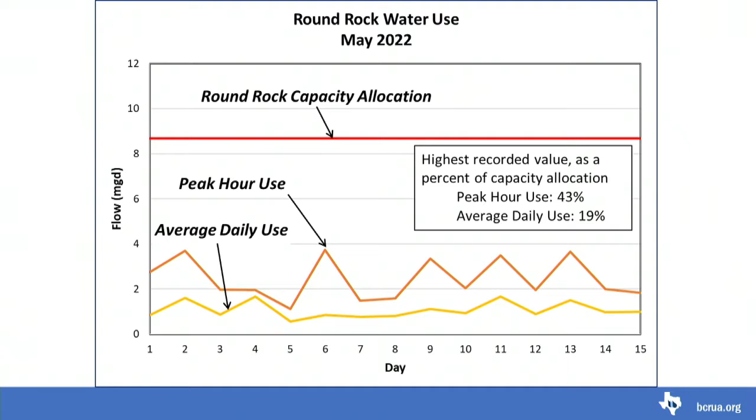And then the next slide is Cedar Park. Again, the red line is their capacity allocation, and they're ranging between 12 and 18% for their average day, and then 12 to 18% on their peak hour.

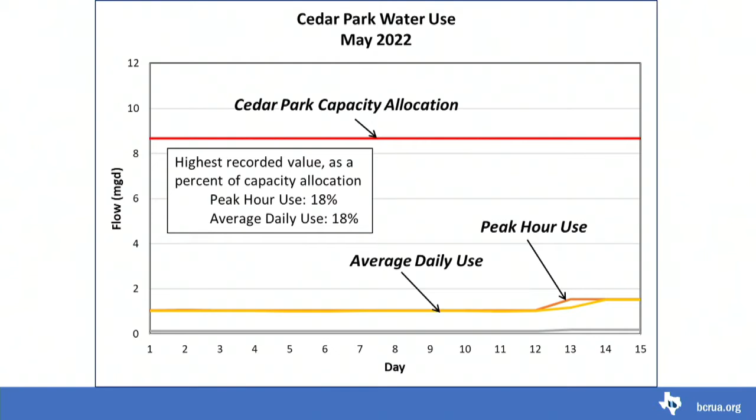And then Leander's the next. Leander ranges between 47 and 60% of their average daily use, and 76 to 95% of the peak hour capacity.

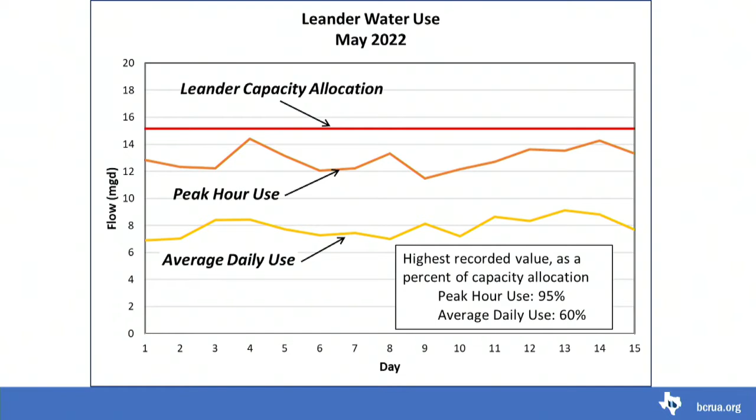The next slide shows how the demands of the three cities relate to the total BCRUA plant capacity. The plant right now has a 32.5 million gallons per day capacity, and the total use is about 12 MGD on average, about 36% of the total capacity. I hope this helps characterize the numbers I'll be providing, but I'd like your feedback as to whether that's helpful or if you'd like to see anything different.

So of the capacity for the plant, with all the cities, we're only using 32%? 36, about. I'm sorry, yeah, I couldn't see that clearly. You can see it kind of ranges. Okay, thank you.

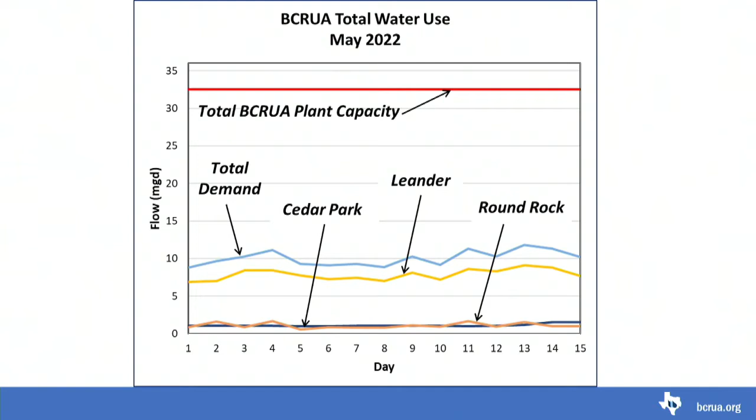You also had requested that a Leander representative provide an update on Leander's water supply, and we have Dan Grimsboe here to do that once again. Good evening. Good evening to the BCRUA President and Board members. I'm Dan Grimsboe, the Executive Director of Infrastructure for the City of Leander.

Today I am providing a presentation outlining the resolution that the City of Leander City Council passed this past council meeting, May 5th, supporting the comprehensive plan for the management of water system treatment, capacity, and demand. I provided a hard copy for each of the members. I know we had sent the link, but sometimes life gets in the way, so I figured I'd take the time to provide everybody a hard copy of said resolution supporting the strategic plan the city manager outlined in his two memos.

Many of the slides in this presentation have been provided to the City Council in a couple of different City Council workshops, so Councilmember Thompson may be familiar with many of them, but for the rest of you, it's not the first time this has been put out there. We're going to go over the focus of the recommendations, which are six areas, and I'll talk about each one briefly — what we're doing, what we have done, what we're currently doing, and what we're going to do in the future for water management.

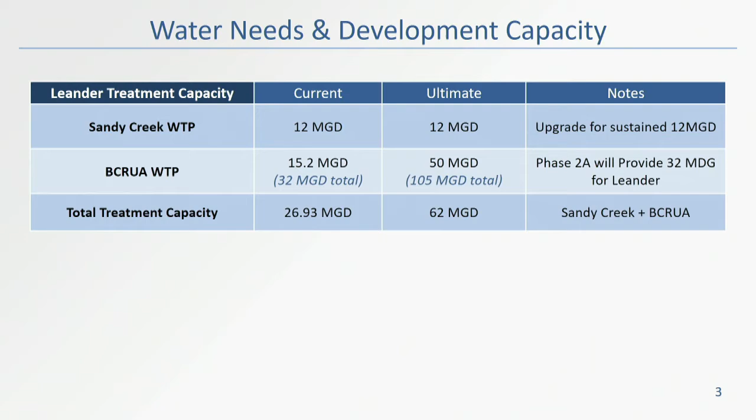The next big one for us, which is important, and that's the one we're hoping we get focus on, on top of other projects, and I have a slide that talks about that, is Phase 2A, which will provide the city, from the plant itself, 32 million gallons per day. That will get us to 44 million gallons, which will put us on the other side, literally, of the water line. So we'll have more than enough water.

So here was the city of Leander, not too recent past actually. Just quickly going over it, you can see we have 5 different pressure planes.

At that time, say even a couple years back, we had the one intake from the BCRUA, which is right here. And then we had the other one, right in this area, for Travisso. And then our water treatment plant, Sandy Creek, actually went to Crystal Falls, which is right here.

And you can kind of see the arrows, how they went through the old part of the city and then worked their way up. But we really didn't have anything going, if you want to say, east to west, mostly north to south.

Just for reference for the next one, Liberty Hill is up here, and we provide them water. And then Georgetown is in this direction, and we have a connection with them over here, which is not shown on this current map, but is there.

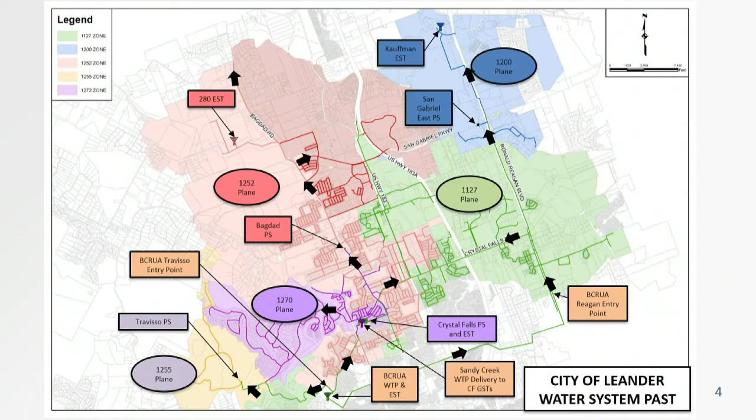So what have we done over the past basically year and a half, the 2 years? Well, in FY21 we completed these 3 projects.

So, San Gabriel Booster Pump Station, and I'm going to show you the map of all these, but I just want to give you a feel for how many are out there. So we've completed those 3 projects, which will help move water throughout the city, and they were $5 million, $1.7 million, and $1.5 million respectively.

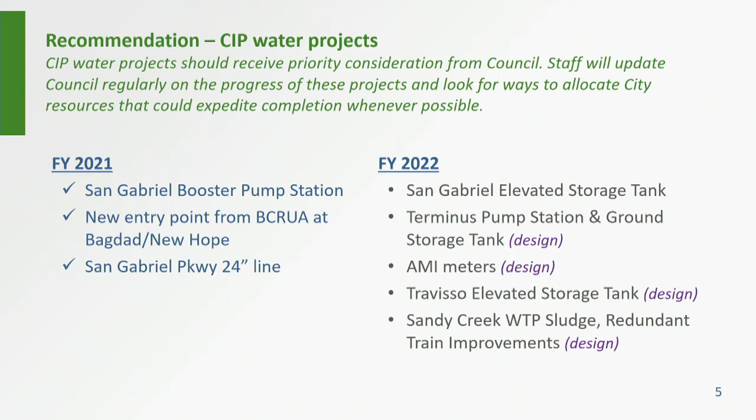And FY22, we're getting ready to bid out the San Gabriel elevated storage tank, and that's going to be about $5 million. And then you can see where it says we're in design, and we're in design for the next 4 projects that will help manage water throughout the system.

And those projects range from $5 million to the Sandy Creek, which is about $16 million for the improvements. So FY23, you can see where they're being designed now, and then next year we're going to start construction on many of those.

The one that's probably kind of important, not only to us but the other cities as related to also controlling peak demand, which you've heard about, and not exceeding our limit, is probably the Ronald Reagan and the Terminus Pump Station. Part of the initial plan of the water plant was to have a peaking factor of a certain amount, and in Chapter 8 it indicated 1.6.

But for various reasons, it was not 1.6 — it was closer to 1, because the cities would put in their own storage that they would need. And in that chapter, it indicates that Leander would put in, in phase 3, which is still a ways away, but we need it sooner, 2 million and 5 million at take points 1 and 2.

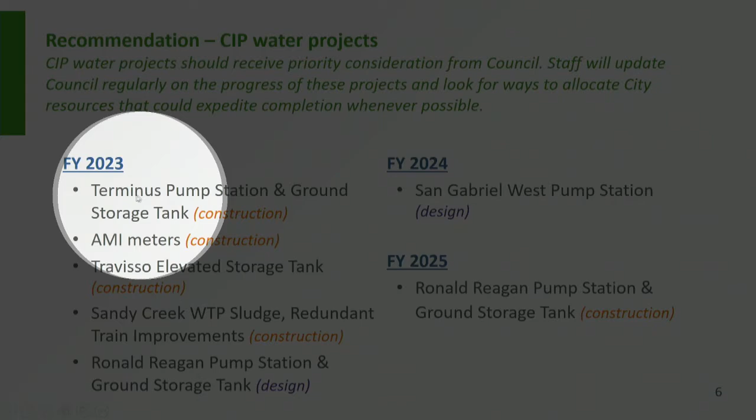Well, the Terminus Pump Station is now going to be really where our take point is, which is take point 3, the new one, and you'll see that in a minute. The other one is the Ronald Reagan, which is going to be designed as the 5 million gallon storage tank, and the Terminus Pump Station will be the 2 million gallon storage tank, as per the initial design.

Those were actually not designed to be done for years out, but not only those two projects — several of these projects have been moved up dramatically from the initial water master plan.

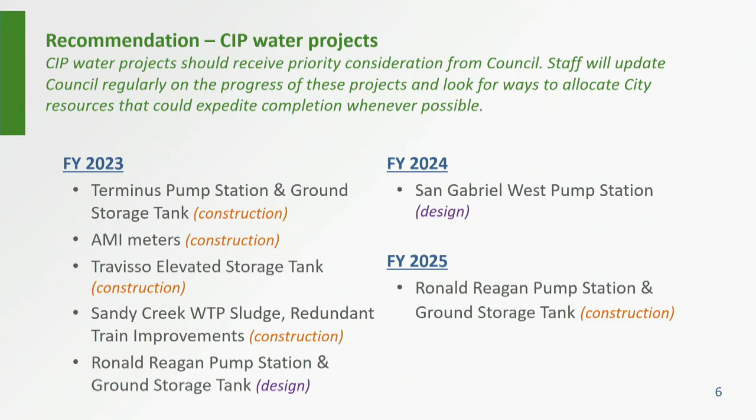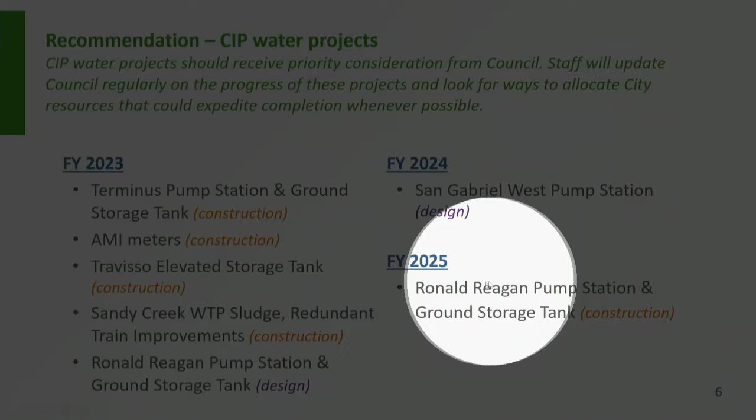And then you can see the last couple where they fall into, as far as this one will help the northwest part of the city and also Liberty Hill. And then this was when we're going to start construction for the Ronald Reagan.

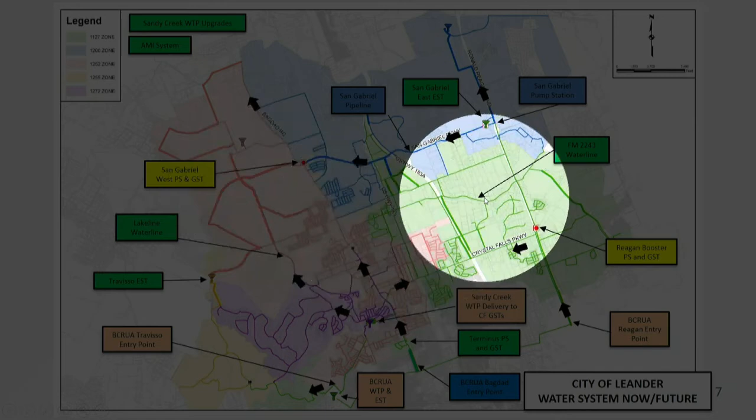What we haven't -- you'll see that these lines all popped up. They're not quite on the list yet, but we do have this one, which is also another one going from east to west, to allow water to go that direction, and that one is under design and should be under construction hopefully in the next year. So you can see that we made quite a few improvements and moved quite a few projects up to facilitate

bettering the distribution system. That doesn't help the treatment part of it. That's the BCRUA, that's Leander's plan, is to have that plant built. It's been the plan since the beginning. That $50 million will take Leander quite a few years into the future. It's just getting there.

Any questions before we kind of move on with Leander's projects?

That's what I was just getting ready to ask you, for those watching online, to clarify how all of these improvements actually impact BCRUA, our partnership with BCRUA. It doesn't affect that at all.

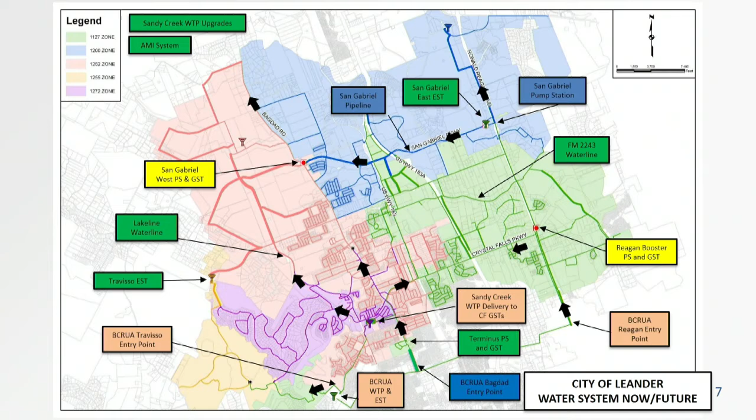It's going to help us manage water better and be able to control demand better, especially when we get the required ground storage tanks in. But until we get that in, we do have concern with our... And remember, the BCRUA plant is the plant that Leander really does use. So when we're using the full amount, it's because that's our plant, and we plan to use it, and it's going to be the primary source of water for the future.

Sandy Creek may get some further expansion, but not probably anytime soon. So BCRUA, this is important for us.

So right now, these are the 4 projects, which is actually quite a bit. We have the raw water line that's under design, and then Phase 1D, which will provide Leander an additional probably 3 million gallons -- we were hoping closer to 5 million gallons. But I think we've talked before that the raw water line is going to put some restrictions on flow, which will limit the amount of water that we'll actually receive for Phase 1D.

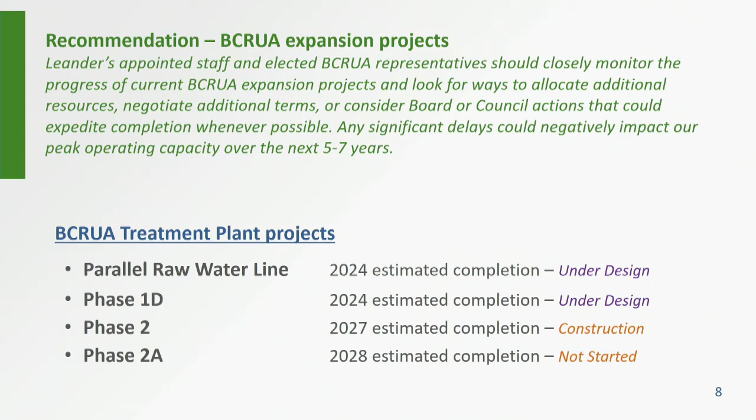Phase 2 is actually the deep water intake, but that doesn't add any water -- that's the mechanism for getting raw water to the 3 water plants. And then Phase 2A, which is the phase that has not started, that's the phase that Leander -- and we've talked about it a little bit in the OC -- that's the phase that we really need to get moving forward, because that's the one that will get Leander the water that allows Leander to be on the other side of, if you want to say, the deficit water line.

They came to us, and in my understanding, they were kind of promised water, but when Gene and I were learning the situation, we had to tell them no, we can't provide any more water, because they have an additional 600 acre-feet they can buy out of Lake Travis from LCRA. They'd love for somebody to treat that, but unfortunately we're not able to do that, and I had to let them know that was the case.

So they have the 1,200 acre-feet that they can receive from Lake Travis. Our contract with Liberty Hill is for 40 years, so we are their water supply, at least for that amount.

Georgetown is a temporary contract that was initiated, and they initiated that contract with Leander much the same reason why we can't initiate the contract with Liberty Hill, because their growth is tremendous. If you were to go look at the presentation they gave their council, and I have one with me, their red line actually looks probably worse than Leander's.

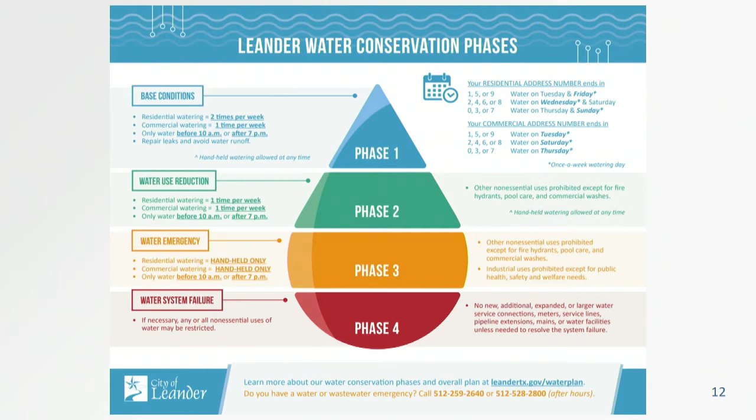So our irrigation pilot program—this is one where, other cities have this, but we're kind of starting off to see how it goes. We're hiring a licensed irrigation vendor to go help homeowners with their irrigation.

It's amazing how many don't know how to use their irrigation system—they just let it run and pay the bill. I think Mary would kill me if our bill was $1,000 for water, but we've had a couple of those.

It's amazing. The other important aspect is that this irrigation effort is also going to check all the city facilities, all our parks, all our facilities, to ensure that the city itself, through our irrigation systems, is working properly so we're not wasting any water. So we're doing that twofold.

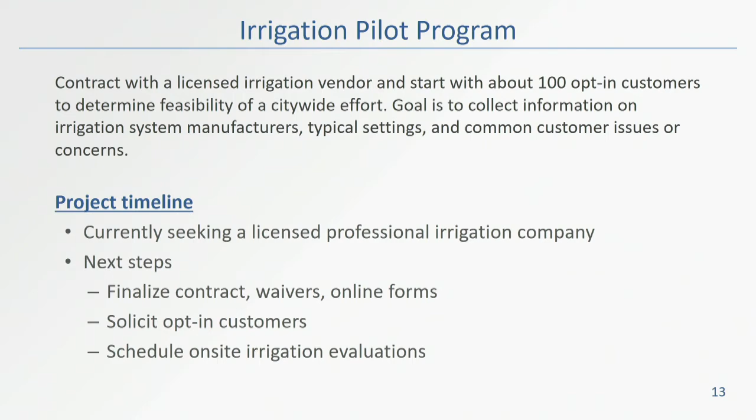Our conservation coordinator—that's another one of our big initiatives for the city, and that's one of the reasons we met with Georgetown's conservation program manager and her team.

We kind of took this and fast-tracked it, so you can see some of the things we went through and the timelines we were looking for, to come up with a little more data. It was amazing, in the short time we had, the number of applications we received.

Gene and I and Mike are going to be interviewing 2 this Thursday, and then 2 next week. We're hoping that one of the 4—they all have really good applications and resumes—will be selected and want to come work for the city of Leander, helping us with our conservation program.

The other aspect as part of the memo was the BCRUA communications, and we continue that. These are kind of the areas that we work.

The last one is one we've set up—kind of a bi-weekly meeting with Councilmember Thompson related to what the city's doing, and cross-referencing it with the BCRUA's activities to see how we're gelling.

The first one: we continue to work with the BCRUA staff to figure out how to get our 3 take points to work together, because we don't have those tanks. So it's kind of a balancing act for us.

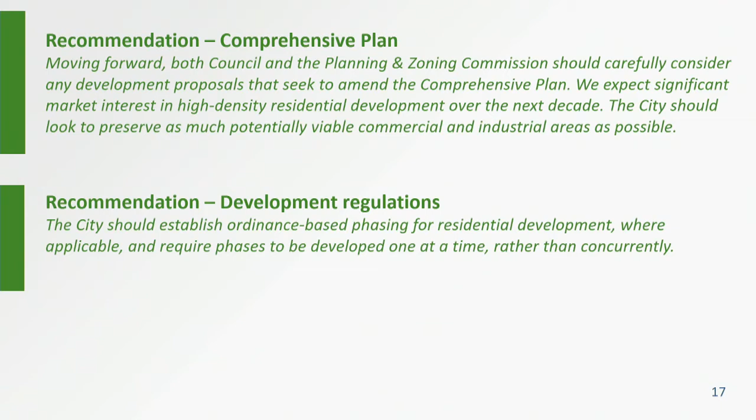There's several that are in review, but we're trying to do this phasing of residential developments. One was already approved through City Council, where they build only so many houses for the first 2 years, the second 2 years, the third 2 years. So we have a couple of planning concepts we're working on, and along with the planning, landscaping changes that we're making, and those are in the process of being approved. So those recommendations are also moving forward.

Now, I will remind everybody, again, before I go with questions here, that the BCRUA is our plant, and we actually need to have it run, and we're going to use the majority of the water, the same with Sandy Creek, because it makes good sense. The more water we use for it, per 1,000 gallons, actually, the less you pay probably for the actual water because of the amount of money you're putting into it to build it.

The other part is that it's so important to us that the Sandy Creek and the BCRUA are actually in our emergency preparedness plan for the state. So via the SB3 bill, that plan is part of our system, and it's actually in that plan to make sure that it runs. And so we had to work with BCRUA to facilitate getting the emergency preparedness plan from them and then incorporating it into ours and sending it to the state to see if they agree with that.

We opened proposals back on March 22nd, and we received a total of 6 proposals. We were doing this as a competitive sealed proposal procurement process, not a traditional low bid delivery. Of those 6 proposals, 1 was determined to be non-responsive. We then took those proposals and evaluated them on a combination of qualifications and experience and also cost.

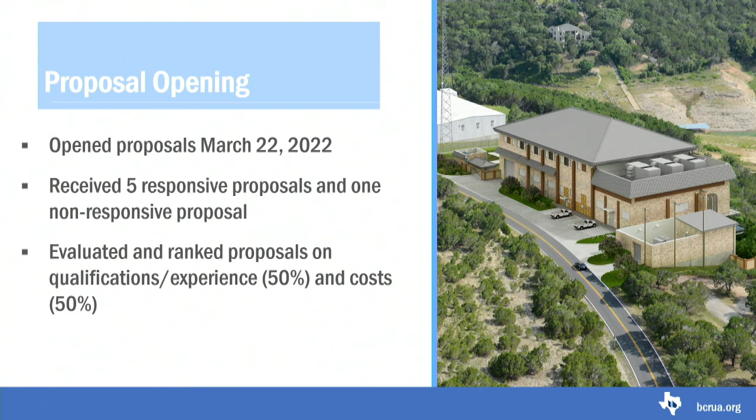Broken roughly in half, 50% of the scoring went to cost and 50% went to quals and experience. We received in those 5 responsive bids costs ranging from a low of about $225 million to a high of about $360 million. And I'll tell you, that's one of the highest spreads I've ever seen in a project. It really indicates to me how contractors are struggling right now in these economic conditions to figure out how to handle things like labor shortages, inflation, escalation, and supply chain issues.

Each of them approached it a very different way. And in that spread from 225 to 360 million, we didn't have the costs lumped on one end or the other. They were really kind of staggered throughout that entire range.

The cost proposals that we received from those contractors also had separate proposals within them for pump procurement. Because those pumps are really the heart of the project, we wanted to have the opportunity to look at pricing and qualifications from the pump provider, not just the contractor.

And with all of the proposals that we received, the pump manufacturer that we selected was Indar from Spain, which is a facility that we went back and visited a few years ago to confirm that they had the production capabilities for the project.